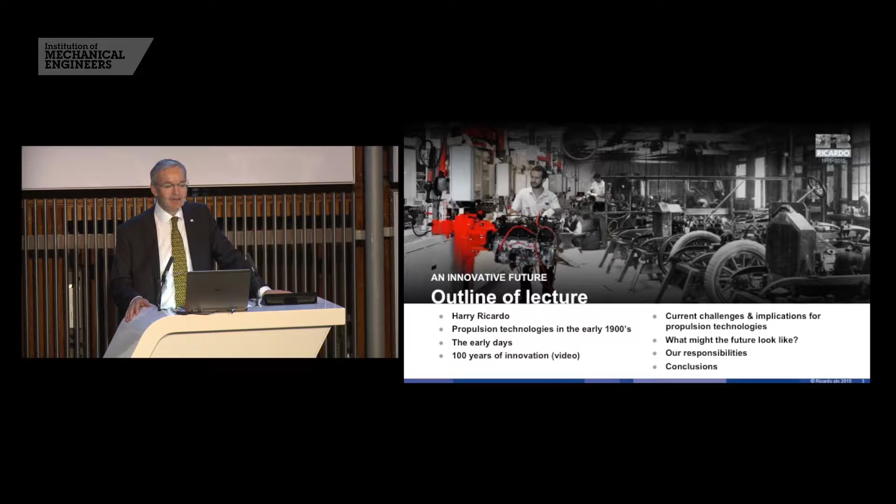depending on the topic. And I'm going to spend some time talking about our responsibilities as engineers. What do we need to do? How can we prepare for the future? How can we set ourselves up to respond the best way? And I'll finish up with conclusions. This lecture takes anything between 45 minutes and an hour, depending on how carried away I get on some topics, but I'll do my best to keep it reasonably concise.

So, to start, Harry Ricardo, born in January 1885. He was one of the foremost engine designers and researchers of the internal combustion engine. But he didn't start off that way. His family business was actually in architecture, and he was training to be a civil engineer at Cambridge University when he got very interested in mechanical things and efficiency.

And he actually entered a prize competition at Cambridge University to try and get the highest efficiency from a motorcycle. He won the competition despite having the largest engine, achieving 40 miles on a quart of fuel. Everybody remembers what a quart is, I hope. The equivalent of around 160 miles per gallon. And in his biography, he explains that that was one of the foremost things that happened to him in his career that really shaped what he would do in the future.

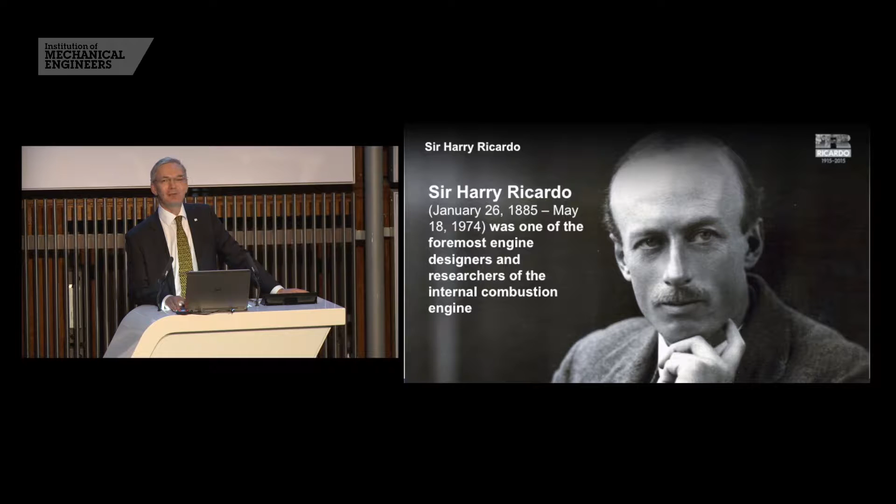To try and put this lecture in some context, I'm just going to start with what propulsion choices were available at the time that Harry Ricardo was at university. So these were generally the choices. You had steam, you had electric, and the early internal combustion engine.

And just to quote something from Harry, which he wrote in 1902: there are 4 different types of engines for automobiles in general use: steam engines, electric motors, naphtha and other vapor motors, which are similar to steam engines in some ways, and hydrocarbon or internal combustion engines. Of these, steam is the most reliable because it is the best understood. So there we are, back in 1902. Steam is actually where the combustion engine is today. And we know what happened after that.

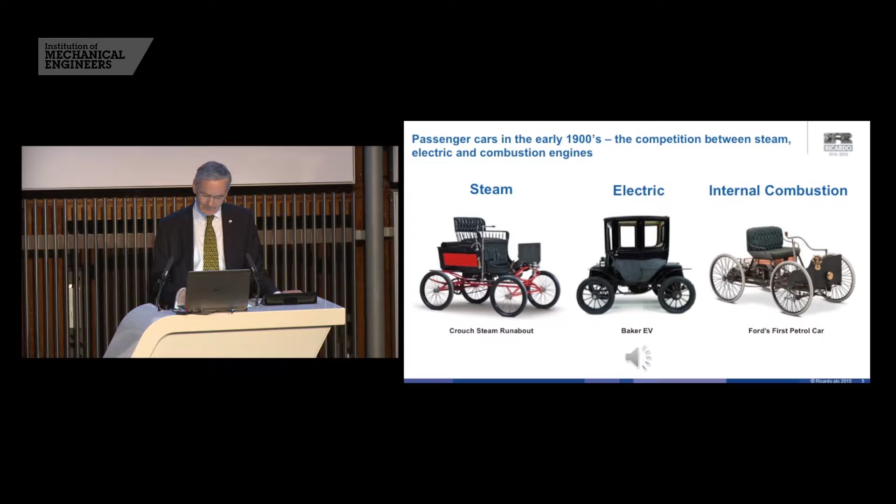If we were to compare those different propulsion systems, the electric vehicles were actually more popular. They were outselling gasoline counterparts by roughly 10 to 1 and accounted for approximately 1/3 of all vehicles on US roads at that time. They were clean, relatively easy to start. However, they were quite expensive. They had a limited range. There were limits on performance, and there were always issues with trying to recharge them. You could argue, well, what's happened so far? How much have we improved?

The charging network in those days was relatively limited, and you had to live pretty near to a power station for it to be viable to charge an electric vehicle in those days. Steam-powered vehicles were reliable, as we described, relatively mature technology, but quite inconvenient. It took a little while to get your steam up. They were relatively dirty and not so good performance.

The internal combustion engine, the primary benefit was its pretty good performance, very good range for a given amount of fuel, and refuelling was quite flexible. In the early days, you went and bought your fuel in a gallon can from a hardware store, but really development of the refuelling network was a key part of how the internal combustion engine won the race in the end.

One of the big changes and the tipping point was probably the launch of the Ford Model T in 1908, and we've got a picture here. Some people have asked me about this picture. What is that young man at the front doing? Is he getting intimate with a Model T? In those days, you had to hand crank the engine to get it started, and of course quite inconvenient for many operators. There were lots of issues with early reliability.

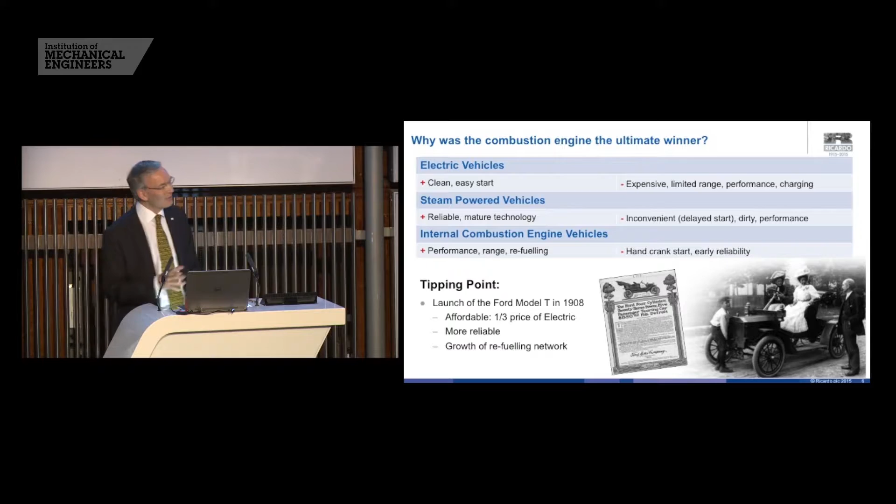So this is the kind of context where Harry Ricardo was when he first started looking into the combustion engine. So a lot of promise from the combustion engine, but many challenges. So his main focus and his main hobby was researching the physics of internal combustion and the design of combustion chambers. And much of this led to some very significant developments, such as the use of octane ratings, the use of stratified charge. In fact, he applied a stratified charge system to an engine he designed and built in 1904, and learning about intake swirl, which we commonly use today. So these are very important things for him.

He built a unique variable compression test engine called the E35 to develop this whole concept of what a fuel would do and when it would start to knock. And the work that he did to develop higher octane fuels directly led to Alcock and Brown flying the Atlantic in the Vickers Vimy bombers. Not many people know that, but that was a key link into this new octane. He explored stratified charge, as I described earlier, and also things like negative valve overlap. I mean, it was back in the early 1900s, very advanced for his time, and something that we regularly look at today.

What I want to do now is show you some very early combustion photography that was done. It has some combustion in and shows how things have developed over time. The first frames show early attempts to characterize in-cylinder flow, and the unique way of looking at this was to put little wool tufts on the top of the piston and film it as the engine was turning over to see what was happening with the air motion.

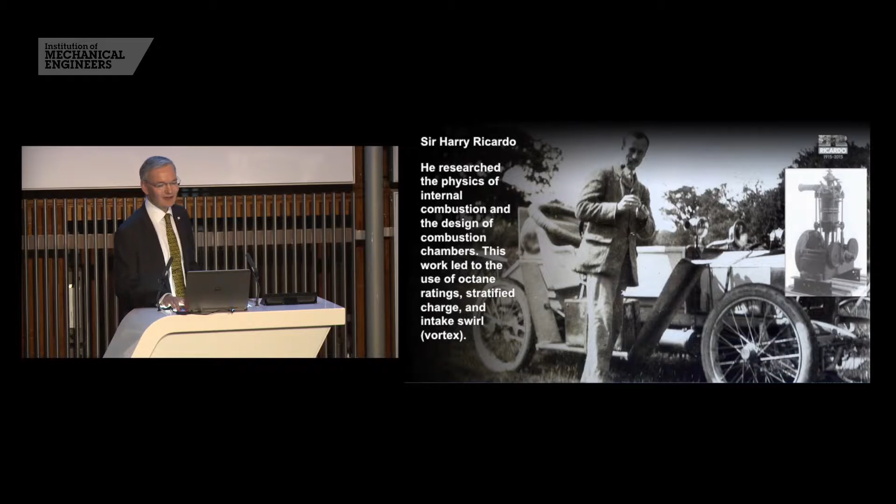And it's actually narrated by one of our past employees, Murray Scott. Murray Scott was one of our most renowned diesel engineers who joined us in the 60s, and perhaps one of his claims to fame was he probably produced the very first diesel Jaguar. He was a very keen diesel engineer. He had a Jaguar, thought, why don't we put a diesel in a Jaguar, and did that all himself as his private motor car. That's how enthusiastic he was. So I'll just play this just to give you some idea of some of the early work.

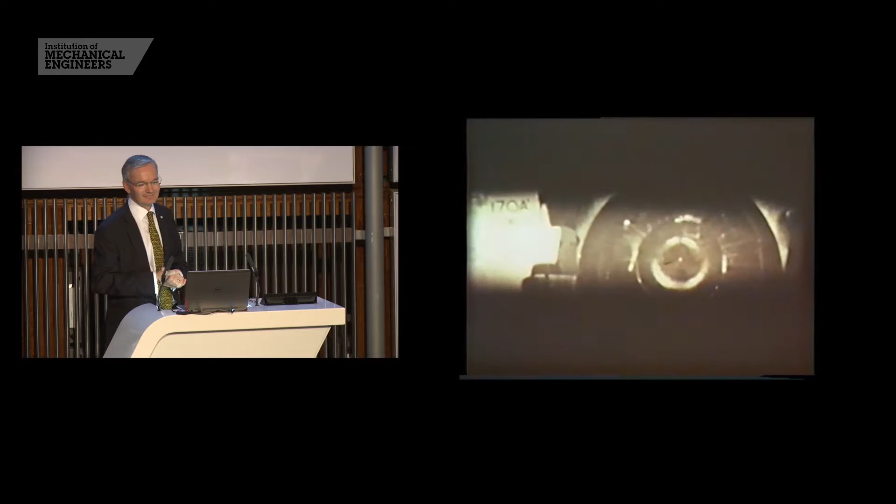This film of cotton streamers attached to the piston and head of a motored direct injection engine indicates slight inward motion before top-dead center and a reverse squish of much greater magnitude after TDC. It is interesting to note that the air velocities during the scavenge period have much greater influence on the cottons than does the squish.

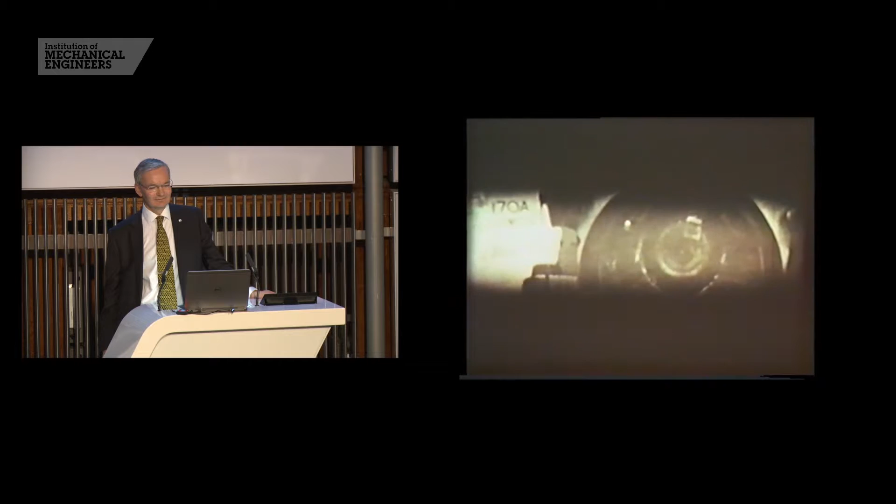So these are some later combustion results, very early combustion results with very high-speed photography. We dug out of the archives showing a direct injection system. Then we're going to show a more modern system, and then what we've been doing lately to actually model that and predict exactly what's going to happen. And we're comparing the two together here to give you some understanding of the correlation and what can be done. So the idea behind these videos is to show you how important that early work is and what was discovered during that time.

Perhaps the best way to describe the origins of the Ricardo company is to look at this very first project that Harry Ricardo was involved in. We'll show a little bit more about this in the video, but the early tank engines in World War I had a lot of issues, very unreliable, and Harry was commissioned, because of his knowledge of early internal combustion engines, to completely redesign a new engine.

It's a relatively large engine, a 6-inch bore engine with crosshead pistons. I'm sure those of you who know engines know what the crosshead piston is. You have an extra link between the crank and the piston, so the connecting rod goes up and down vertically, and you can separate the lubrication from the piston from the lubrication to the crank system. And that proved to be a great success. That technique's still used in very large engines today.

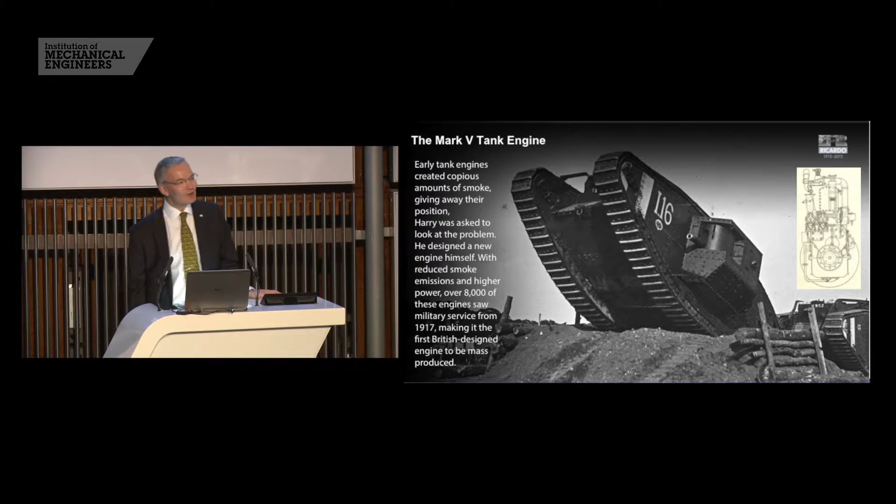The ratings for the engine, anything from 150 to 260 horsepower, was by far the most powerful petrol engine available outside of aviation. Many hundreds were built, and we'll show a little bit more about that in the video. What was interesting was that the Mark V tank engine royalties enabled him to purchase some land to build our original Shoreham Technical Centre. This is a picture of the centre right in its very early formation stages.

There's pretty much, I think, only one building still standing today, which is this one here. You might also be interested to know that this road along here was the main South Coast road at that time, with special passing places on the bridge, because it was single file. And that bridge is still there today, but no traffic goes over it, fortunately.

So we can trace the beginning of the company back to a company that was formed called Engine Patents Limited on 10th of August 1915. This was around designing a new two-stroke engine, and with it the filing of Harry's first patents. It was a commercial approach he used throughout the business career with Ricardo and helped to fund his passion for developing new technology.

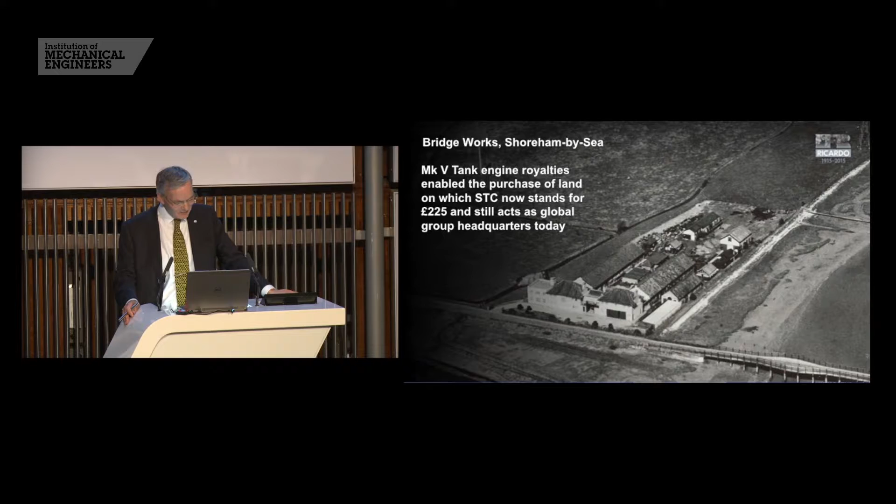As a result of all this work he did on the Mark V tank engine, the Defence Ministry paid Harry £30,000. Now, £30,000 in that date was worth about £1 million today in royalties. And that enabled him to purchase the land that now houses our Shoreham Technical Centre. He bought that for £225, about £10,000 today, and he spent a further £15,000, about £500,000, building and fitting out his new research laboratory. So that gives you some kind of idea of the early stages of the company.

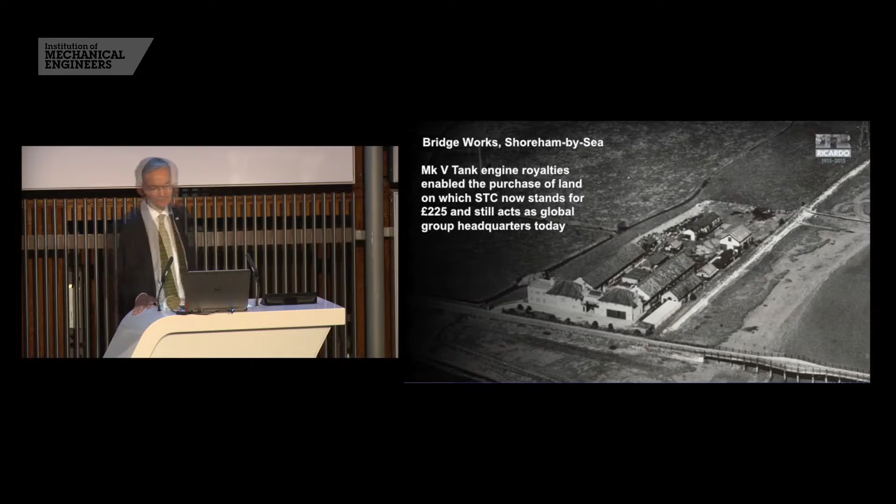To set up our video, which I'll show now, which describes how the company developed since its early beginnings and some of the innovations that were generated. Ricardo, 100 years of innovation and technology. In 1915, the gentleman engineer Harry Ricardo founded the business which is today known around the world as Ricardo plc.

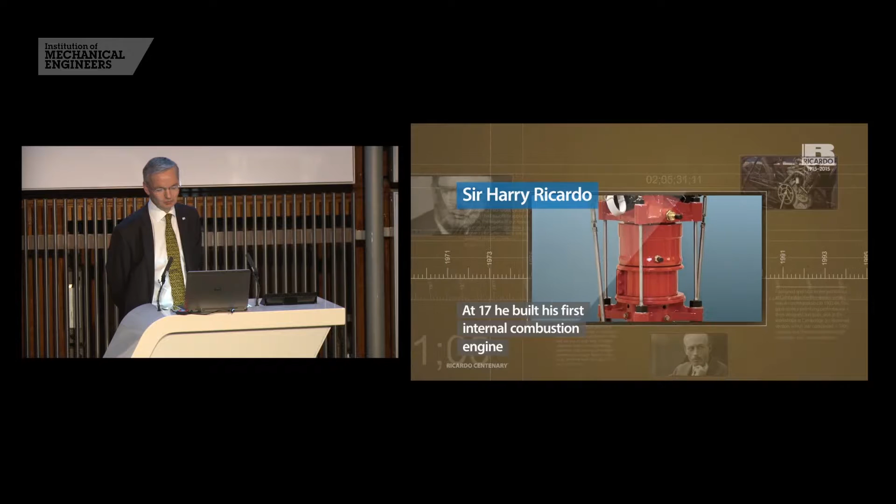From a very early age, Harry was interested in all things propulsion. He built steam engines as a child, and during his time at Rugby School, his schoolmasters didn't know whether to commend or reprimand him when he fitted a steam engine to power his bicycle. By the age of 17, he had designed and built his first internal combustion engine to pump water from the well at the family home. He went on to study at Cambridge University, where he built his own motorcycle, joined the University Motor Club, and won their inaugural fuel efficiency trial in 1904, despite his motorcycle sporting the largest engine in the contest.

Harry became one of the foremost engine experts of his generation and received a knighthood in 1948 for his work in the field of internal combustion engineering. He retired in 1964, but the company he founded continues his relentless drive for innovation and technology to this day.

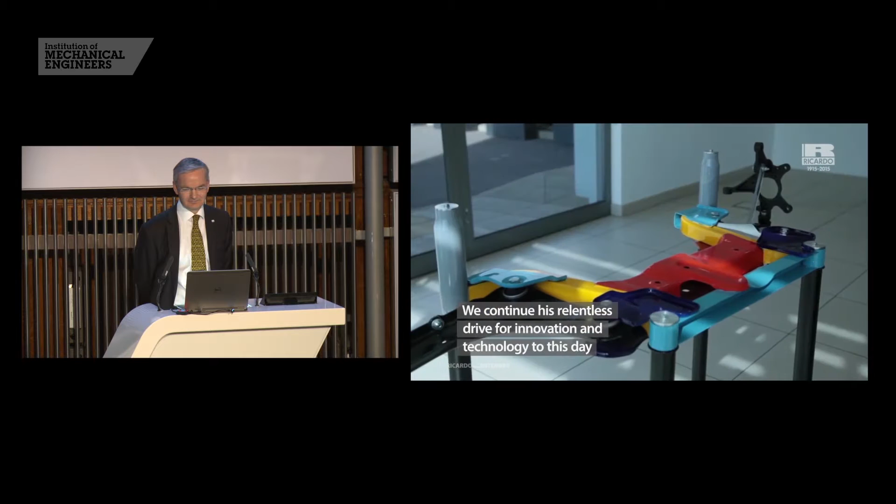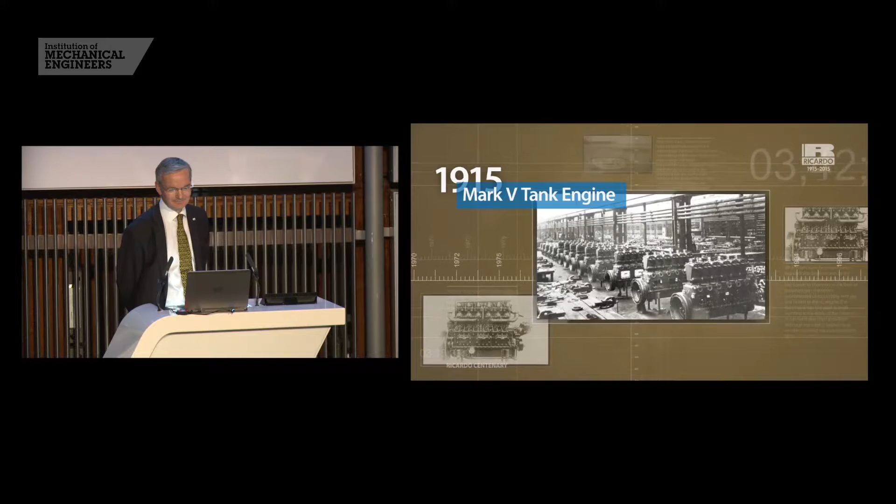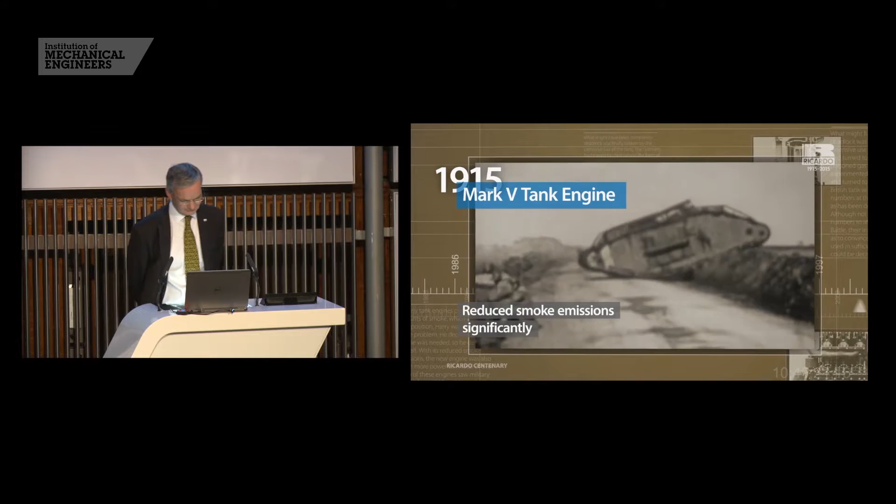Our first major project was in 1915, when Harry was commissioned to apply his advanced combustion knowledge to the Mark V tank engine. Early tank engines created copious amounts of smoke, which gave away their position. Harry was asked to look at the problem. He decided that a new engine was needed, so he designed it himself. The new engine reduced smoke emissions significantly and was also much more powerful. In total, over 8,000 of these engines saw military service from 1917, making it the first British-designed engine to be mass-produced.

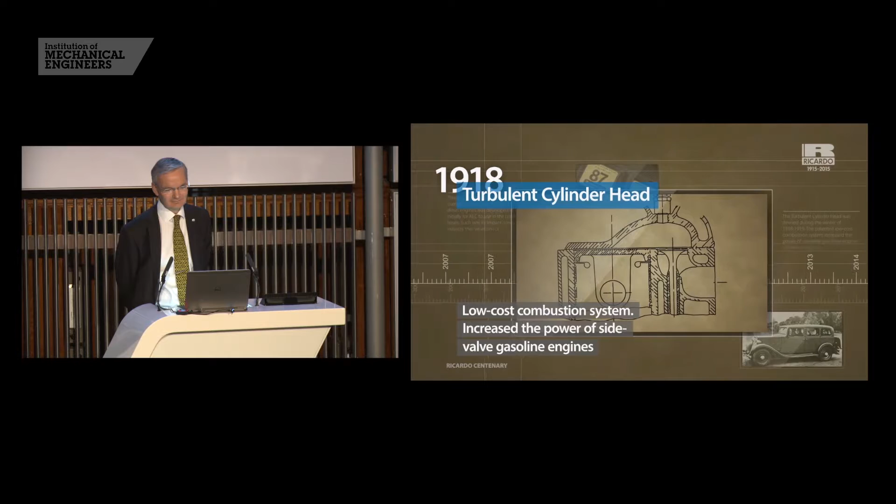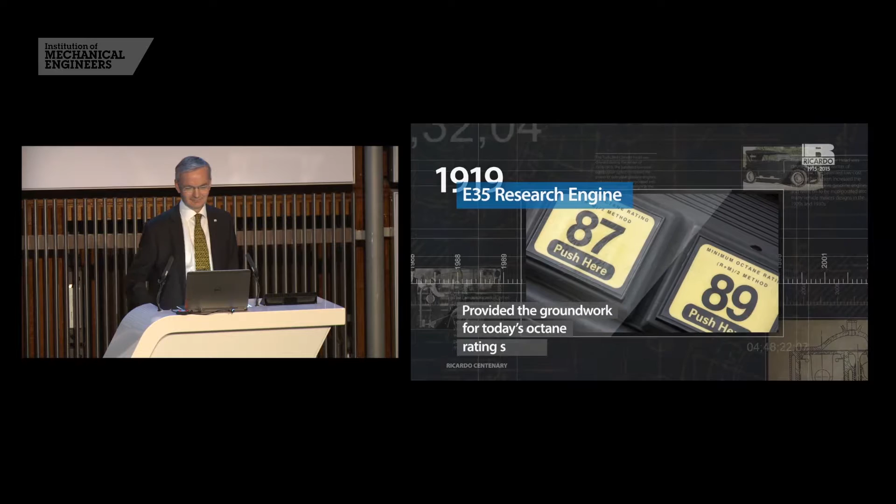Many combustion innovations followed. The turbulent cylinder head, devised during the winter of 1918 to 1919, was a low-cost combustion system that increased the power of side-valve gasoline engines. The variable compression ratio E35 research engine, developed in 1919, enabled the combustion properties of fuels to be accurately analysed and provided the groundwork for today's octane rating system.

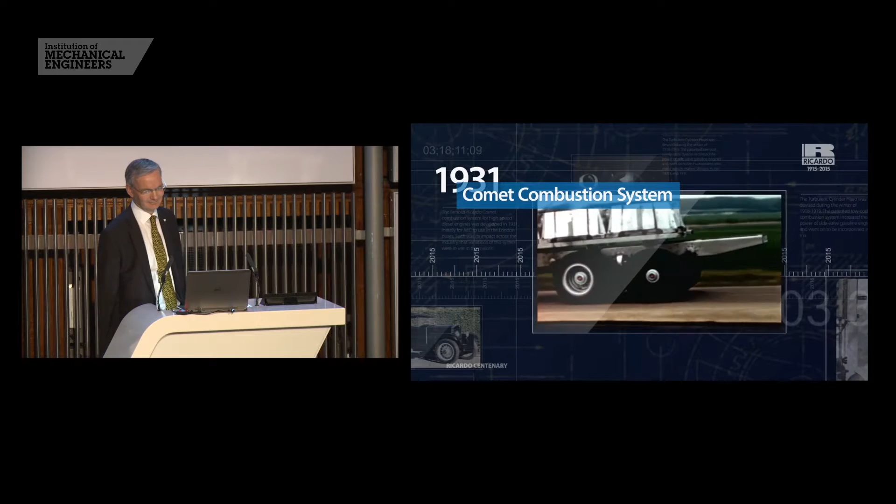In 1931, the Ricardo Comet combustion system for high-speed diesel engines was developed, initially for AEC to use in London buses. However, such was its impact in reducing smoke emissions and improving fuel economy that variations of this system were still in use in the majority of diesel passenger car engines until the mid-1980s.

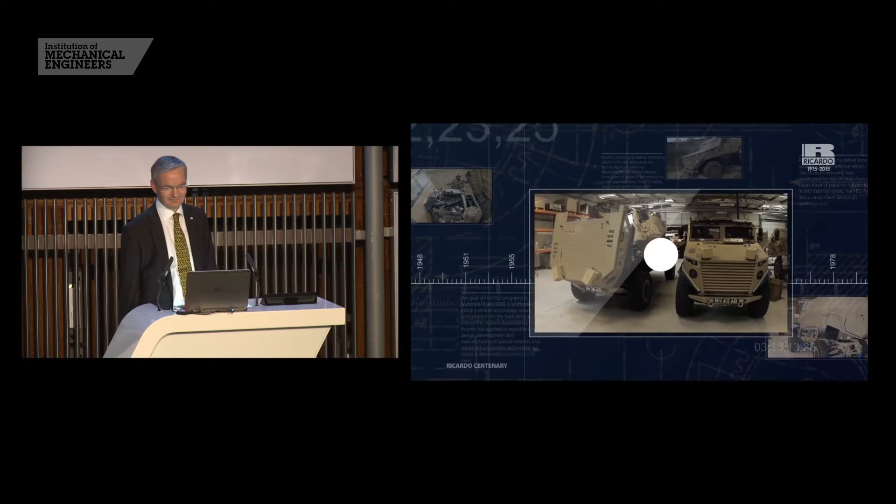The breadth of our expertise has grown and now covers all major vehicle systems, from engines, transmissions and hybrid and electric systems right through to complete vehicle design and production, such as the Ocelot Foxhound for the UK Ministry of Defence and the FED Alpha for the US Army.

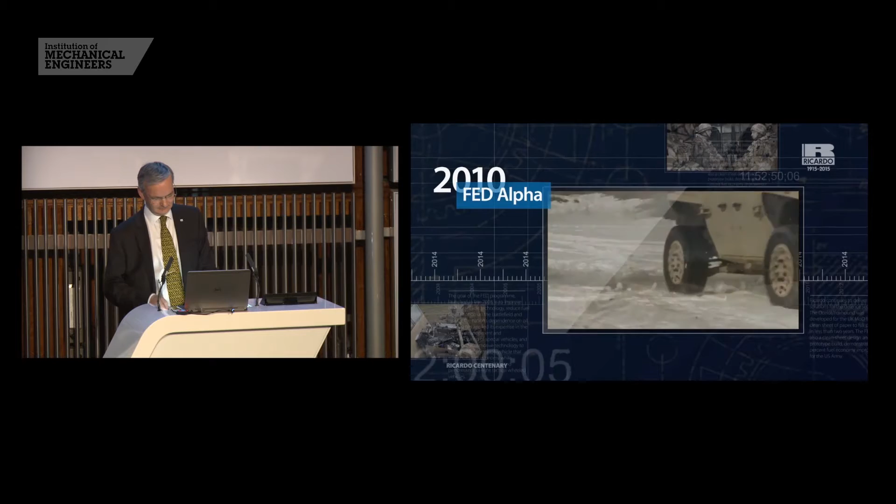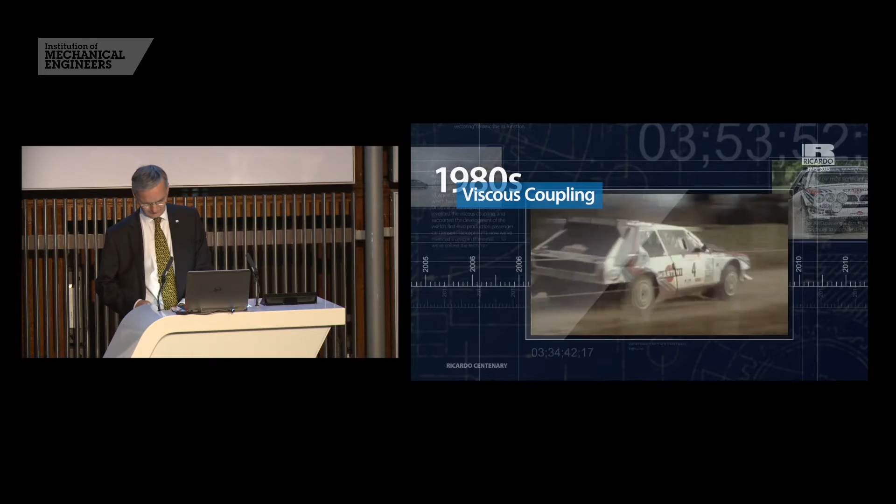One of our most significant transmission innovations was the Viscous Coupling, which turned world rallying on its head in the 1980s in the pioneering Group B rally cars. The runaway success of these four-wheel drive cars established a whole new market sector for all-wheel drive passenger cars. We continue to supply engines and transmissions for many motorsport formulae today.

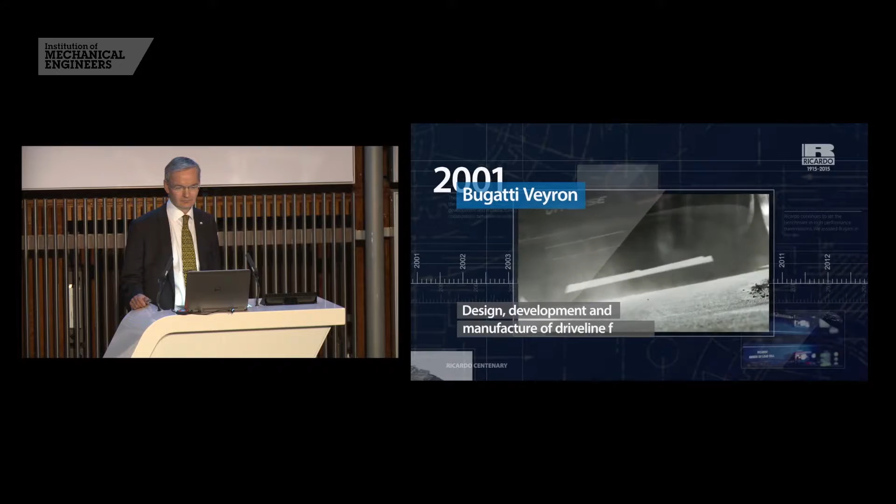We continue to deliver world firsts in four-wheel drive systems, and since 2001 we've assisted Bugatti with the design, development and manufacture of the highly advanced four-wheel drive dual-clutch driveline system for the Bugatti Veyron, the world's most powerful road car. Another world first was the record-breaking JCB Diesel Max.

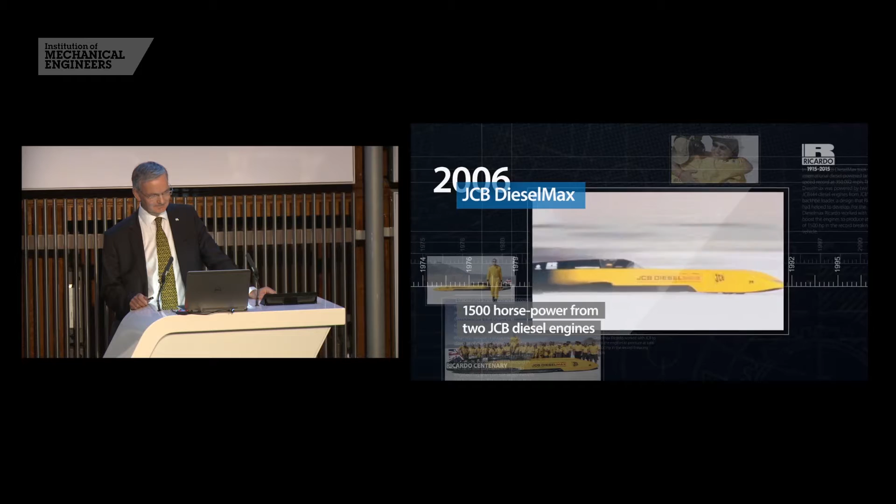Powered by two JCB 444 backhoe-loader diesel engines, we worked with JCB to boost the engines to produce a total of 1,500 horsepower in the JCB Diesel Max, which in 2006 took the FIA International diesel-powered land speed record at 350.092 miles per hour.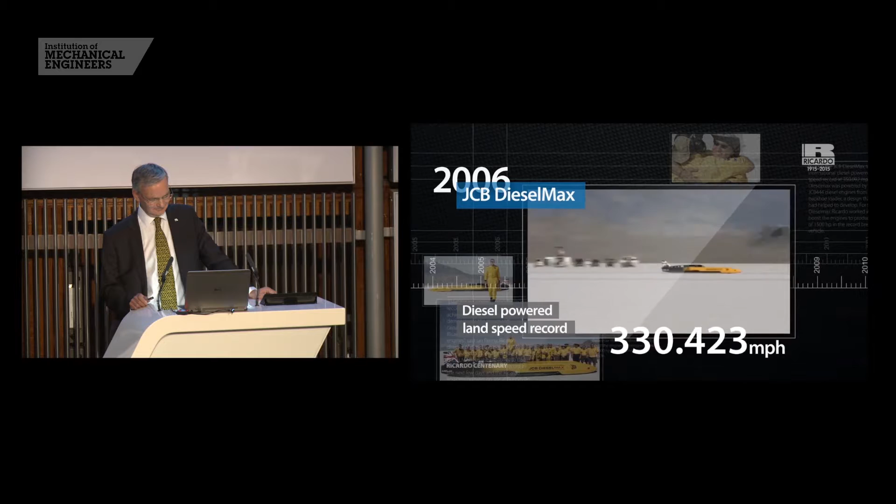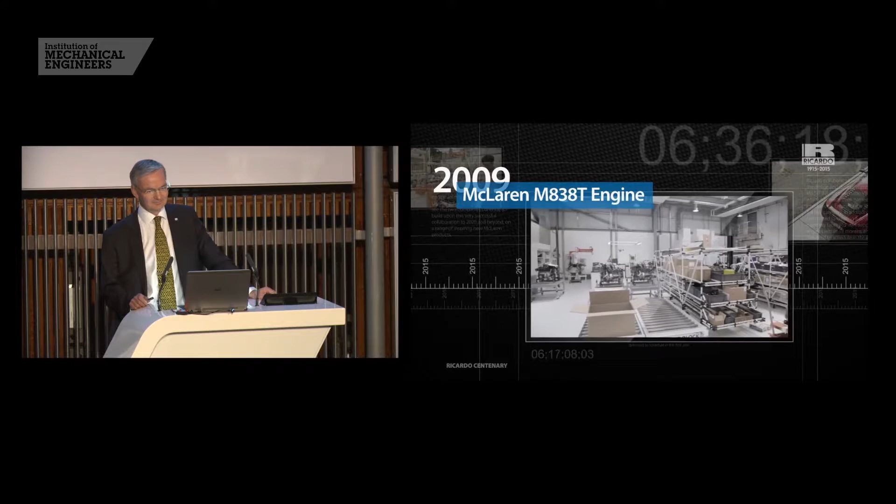In 2009, we collaborated with McLaren on the design and development of their 3.8-litre twin-turbo V8 engine. As part of the project, we also committed to creating a dedicated assembly facility to supply the engines within 18 months. The engine has twice been named International Engine of the Year in the 3 to 4 litre category.

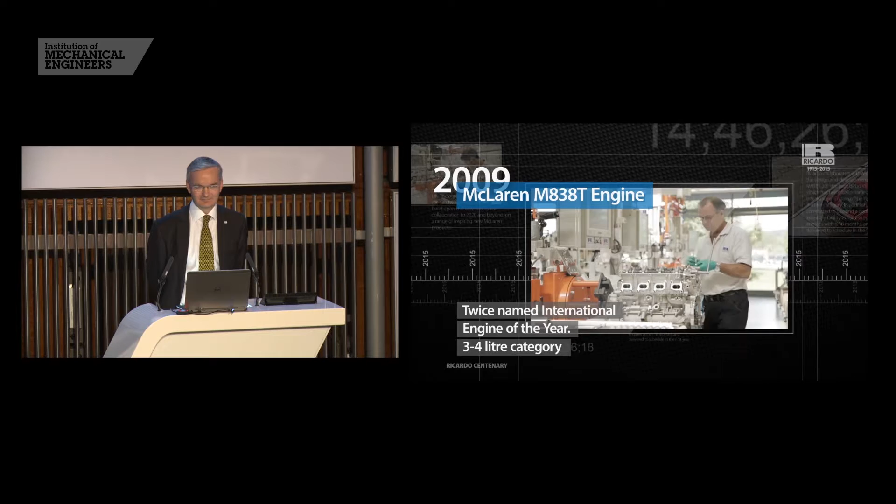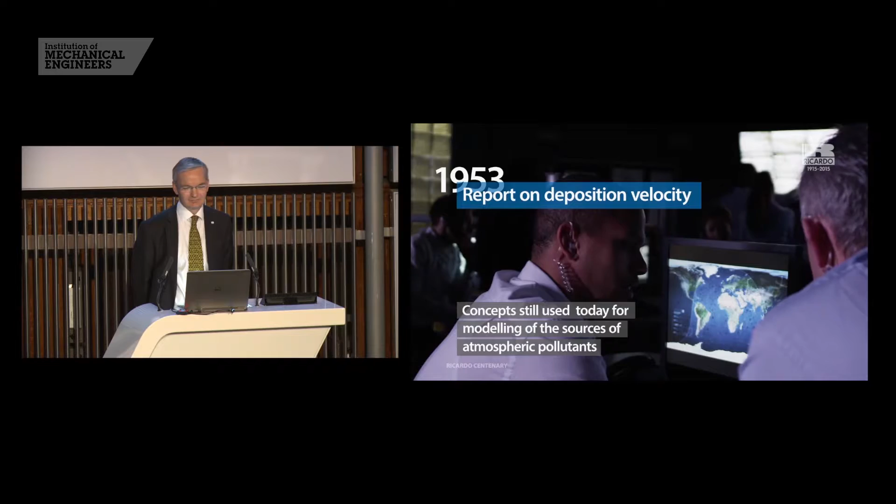As well as engineering a wide range of transportation solutions, our business also boasts a rich history in delivering strategic, energy and environmental consulting services. For example, concepts from a 1953 report on deposition velocity are still used today as the basis of sophisticated computer modelling of the sources of atmospheric pollutants, their concentrations in the air and the exposure of populations and ecosystems to them.

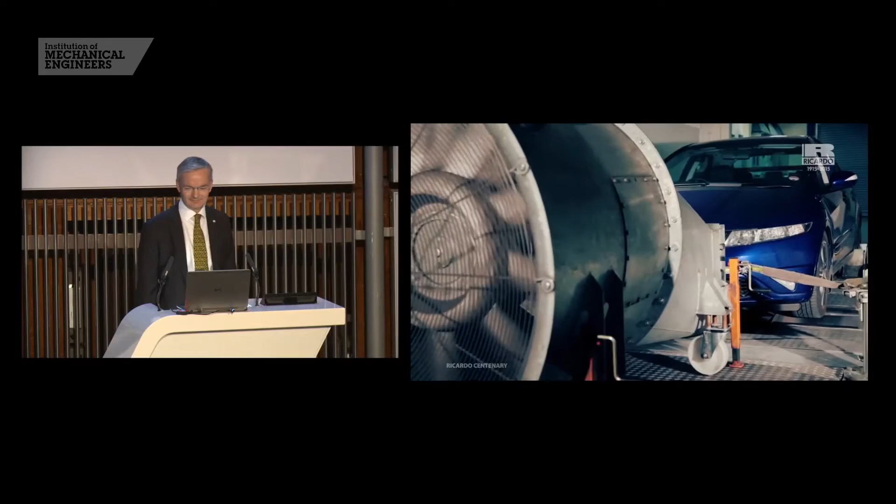Our vision for the next 100 years is to deliver a sustainable future through our work in transport and security, energy and scarce resources and waste. We believe the world needs companies like ours, underpinned by a culture of innovation and a complete team of great scientists and engineers committed to making a real difference. Delivering excellence through innovation and technology. It's what we've been doing for 100 years.

Okay, works second time, which is good.

So just as a summary, these are the innovations which were developed by decade, some of the key things that we went through. As you'll notice, in 2006 we got the diesel land speed record for 330 miles an hour, but it wasn't the first land speed record. We also got a diesel land speed record back in 1936 with the Flying Spray. That achieved 159 miles an hour, so it was good to get it back again after a while.

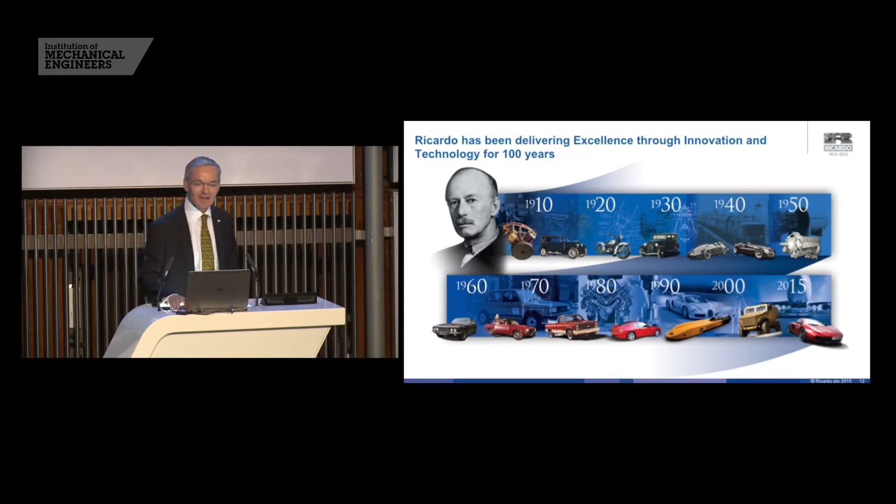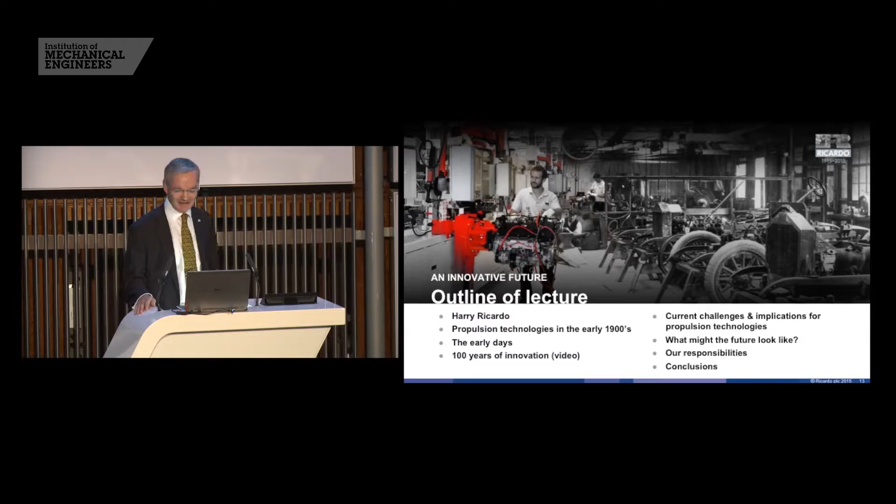What I'm going to do now is move on to the second part of the lecture, which is all about the future. I'll start with the current challenges and implications for propulsion technologies and then look a bit further ahead. So to start with, what are the key challenges that we see going forward for our business? First one here is low carbon, affordable energy. Future energy is a major challenge globally, given the investment required to decarbonise the supply and make it affordable to the consumer at the same time. It's going to take vast investment to make that work, much more investment than we see required to decarbonise transport.

Future mobility is also a very big core challenge when we must also decarbonise transport whilst improving safety and security. When we talk about safe and secure, we have to recognise that around 1.3 million people are still killed on the road every year, and 7 million are seriously injured. It's really something that we must do something about. In addition, we lose about 90 billion hours per year for drivers stuck in congestion and traffic. What a waste of time that is. How do we address that challenge?

Increasing demand for consumer products also leads us to pressure on supply of scarce resources. We'll need to make much more efficient use of these resources using recycling and remanufacturing as a major strategy. And I'm going to go through these issues in turn.

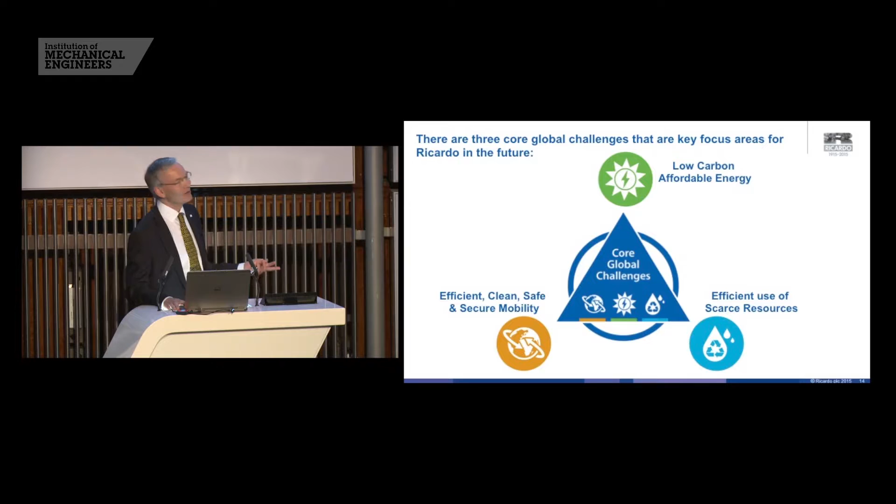But I want to start really with mobility and the revolution that we're likely to see in connected mobility as well. So to start with, increasing requirements for developing these safe and secure vehicles will lead to a very rapid expansion in how we use intelligence and connected systems.

Just goes to show that us as individual humans really need a bit of help to organise ourselves to make the best use of our road infrastructure. And that's what we're looking to do with the connected mobility systems. And I'm sure it's achievable.

We also need to look at how we connect different forms of transport together. So whether we're running trains, rapid transit systems, vehicles, pedestrians, other forms of transit, making them seamless and connect together as well as possible is entirely within our capabilities in intelligent transport systems.

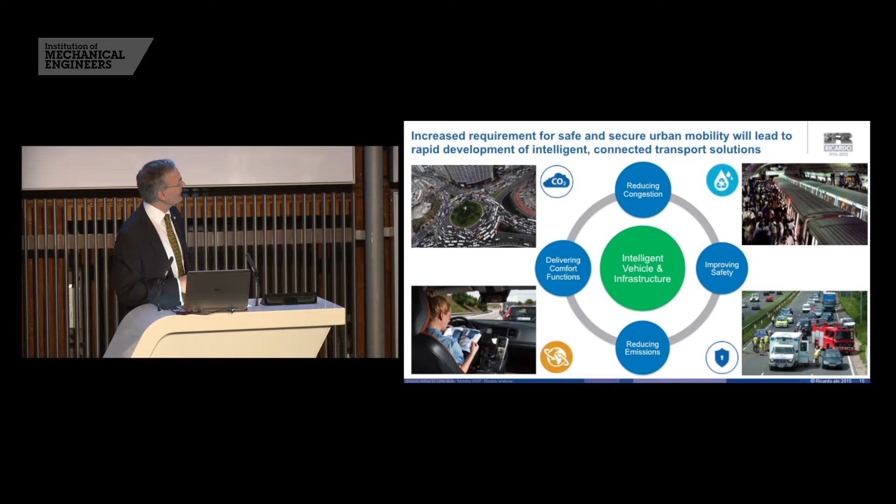We also, as I've described, need to massively reduce the number of accidents that occur. And to do that, we need to take away some of the human driver errors that we have, which are by far the largest cause of accidents. And that again will come down to how we use these intelligent systems, maybe to the point where the driver is not necessarily driving the car anymore. I'll say more about that later.

Another big issue that we have is our resources and how efficiently we use our resources. Just as an example, I was over in the US last week, and the US model, don't want to be too critical of our US colleagues, we have many customers there, is a very linear model. You dig something out of the ground, you turn it into something useful, and then you throw it away. It's not really a very efficient use of resources.

What we need to move towards is the circular model, the circular economy. So how do we recycle things? Using more of a biomimetic approach, how nature uses things. Having said that, we've made great progress in automotive. So automotive recycling is really a world leader.

The 2015 End-of-Life Vehicle Directive sees material reuse at something like 85% just as recycled materials, and including the amount of material that is used again or recovered, including incineration, is around 95%. But the vehicle manufacturers are now responsible for disposal and reuse of the vehicle at the end of its life. And our view is that will extend to pretty much all products within a limited time. But it's a very important thing to grasp.

We must also, when we're looking at future products, look at the whole product life cycle when we're assessing its impact on the environment. Just looking at its in-use emissions is too limited. We need to look at how much is involved in digging material out of the ground and processing it, how much in the manufacturing, how much in use, and how much in disposal.

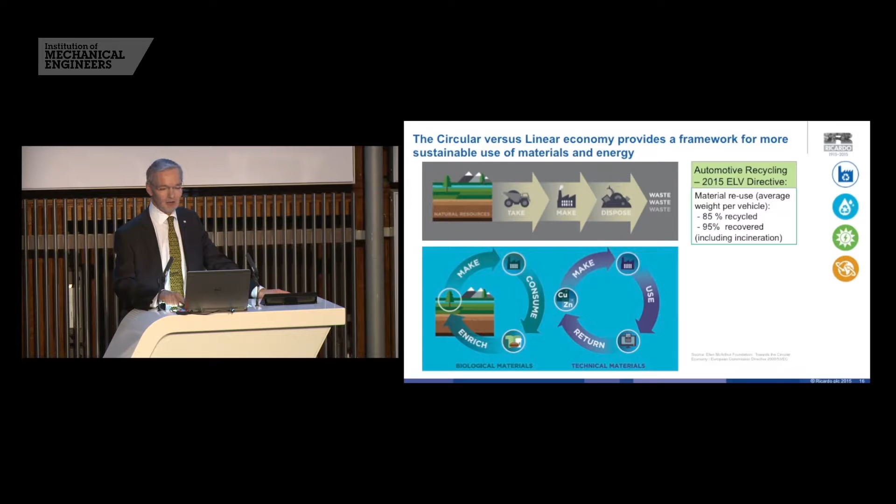It shows many, many countries and their different regulations, but they're all headed towards a very similar position in terms of CO2 emissions. What you'll also notice is it's not the end of the regulation when we get to 2020 or 2025. Those regulations will continue to be more aggressive and drive even further improvements. And it's perhaps the rate of reduction that is the real challenge.

In Europe, we have to achieve something like 3.9% per year improvement in CO2 to get us to the 2020 targets. In the US, it's 4.7%. And that is a real challenge, given their history of doing very little with CO2 emissions over the last 10 to 20 years. It's perhaps the biggest challenge.

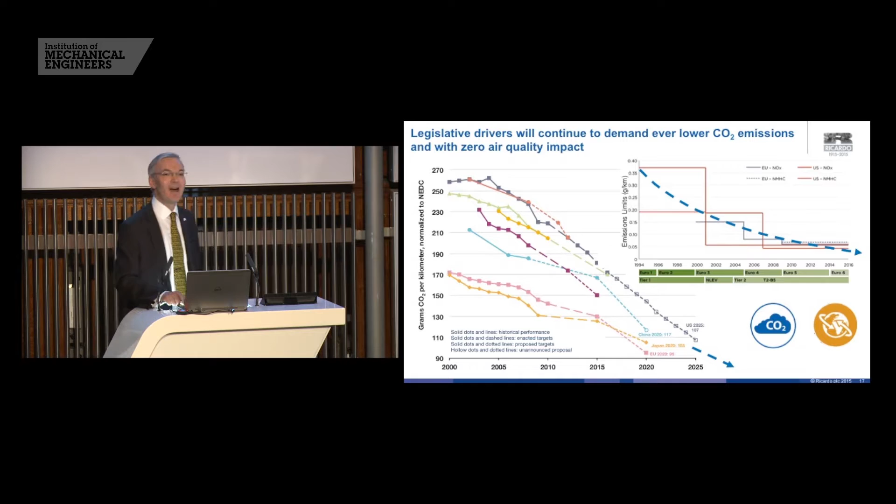But we're still missing the air quality targets for NO2 in London. There's still a lot of work that has to be done. And as you might guess, we need to get these pretty much to virtual zero, to get to zero impact on the environment, which is the overall target. How long it will take us to get there, I'm not sure, but I suspect by the mid-20s we can say that modern vehicles have effectively zero impact on the environment from their combustion engines. And there'll be other things that we're probably more worried about, such as tyres and brakes.

The advanced internal combustion engine, probably connected in some way to electrification, will be the mainstay of our future power plants. All of the predictions I see show that by 2035 to 2040, something like 75 to 90% of vehicles will still employ some form of internal combustion engine. However, we do need to find a way to recover energy as we slow the vehicle down, rather than just turning it into heat as we do with brakes at the moment.

And we also need to find ways to use some of the wasted heat energy that we provide from the fuel. At best, the modern combustion engine only uses about 30 to 40% of the energy in the fuel. The rest is just thrown away, and we need to find ways of turning that heat into useful energy. There are alternatives to using conventional fossil fuels as well. We can run with electric vehicles, but we need to reduce the carbon intensity of the grid if we're going to make that effective. So we need to have low CO2 electricity.

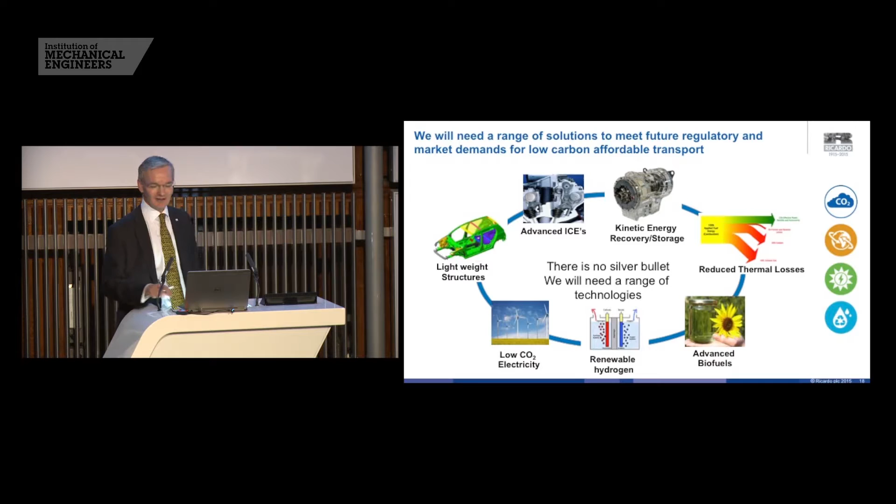There are lots of challenges associated with electric vehicles, but for many applications they could be the solution, particularly in cities. A number of large automotive companies have decided perhaps the electric vehicle isn't going to make it. The challenges with batteries and energy storage are too great, and actually the best bet will be the fuel cell vehicle. And there are some significant trials underway in Europe and in the US to actually put some of those vehicles on the road in larger quantities to see how they work and how they interact.

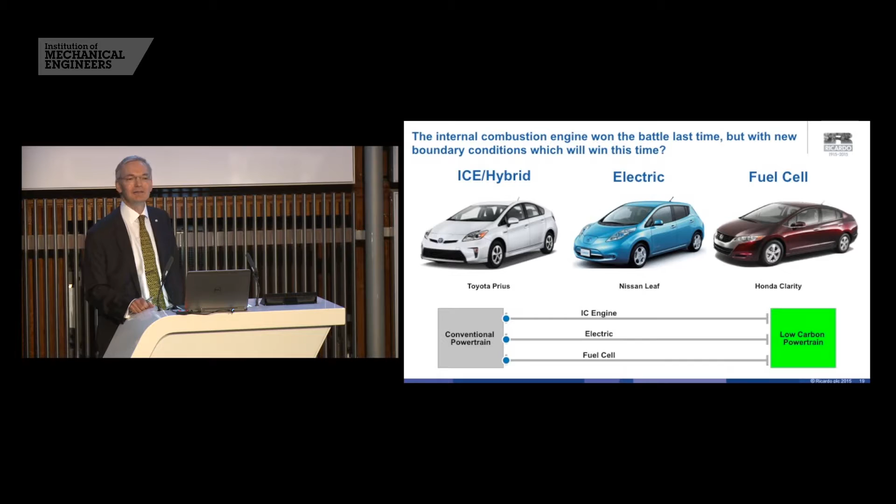However, there's always the challenge that hydrogen fuel cell vehicles are always seen as the vehicle of the future, all the time. Every time it's the future rather than the present. So it'll be interesting to see how those might develop. And of course there's the internal combustion engine hybrid or plug-in hybrid. In some ways that's probably the best bet for the short to medium term. But we must remember that we've been working on the internal combustion engine for many, many years. Electric vehicles intensively only probably for the last 10 or 20, and the fuel cell's really been at quite a low level. And there's a lot more work to be done to turn this into a commercially viable product.

In order to talk a little bit more about the future and where this all might be heading, we've tried to look at megatrends, looking at socio-economic and other megatrends and geopolitical trends to try and work out what the world will be like in the future. Ricardo is traditionally an engineering company, but since we bought an environmental consultancy, we now have a number of social scientists in our group who've really helped us with this. As you know, social scientists and engineers do struggle a little bit sometimes with communication, but we've done our best to try and get these into a concise and engineering-wise table.

So the first one here is population growth, 7 billion to 9 billion by 2050, and something like 60% of those will be Africa and Asia. That will have an impact, and the implication: even more demand for scarce resources, more demand for mobility and energy, and perhaps a change in geo-economic power. There's urbanisation. 2/3 of the world's population is predicted to reside in cities by 2030. And even more megacities. Even bigger challenge for urban people and goods mobility and what comes with that, which is overcrowding and congestion. So even more challenges.

We're going to get increasing incomes and wealth. The prediction is that 60% of the world's population will be middle class by 2030 from about 27% today. What does that mean? A much improved access to education, better healthcare, and an increasing ageing population. It does also suggest more individual choice and freedoms and the rise of the individual. The big one perhaps though is connectivity, the exponential growth in volume and access to information, leading to all sorts of expected trends such as the interconnected global economy, growth of intelligent services and artificial intelligence.

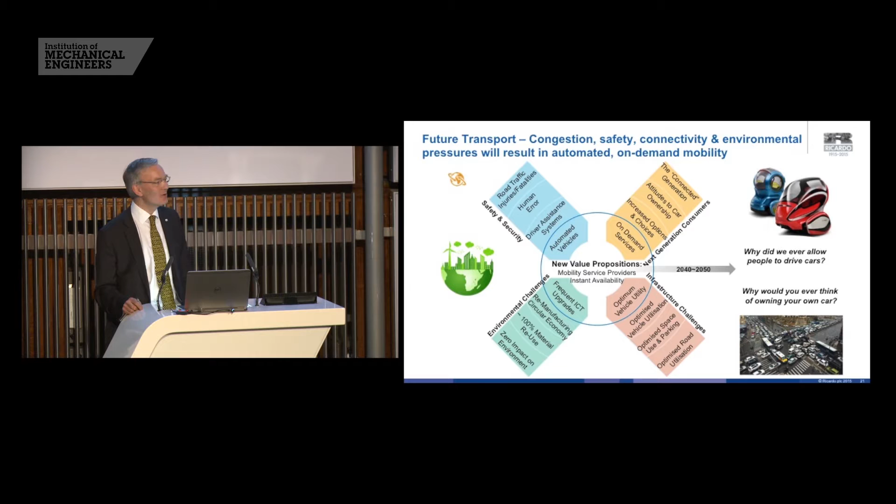But we could easily end up by 2040 to 2050 with some key questions here. Why did we ever allow people to drive their own cars? How dangerous was that? Why did we let them do it? Of course, absolute mayhem. And then why would you ever think of owning your own car? What a limited prospect that would be. I think these are really 2 key points that we need to bear in mind for the future.

Utility on demand. You get any vehicle you want when you need it. Fully autonomous. You can do whatever you want in your leisure while you work. Platooning, pretty much a substitute for public transport. All the systems connect together. We don't need traffic lights anymore. Everything will avoid crashing into each other.

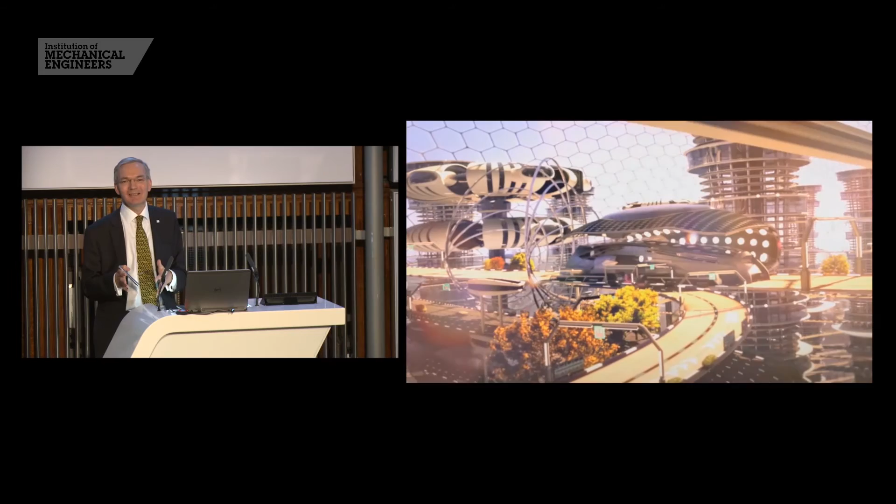Auto-charging, inductive, when vehicles need charging, they'll find a way of doing it. And then when you finish with the vehicle, it'll either move on to go and pick somebody else up or go and park somewhere out of the way till it's next needed. So this is an overall vision of the future. 2030 might be a bit early. It's probably 2050, 2060, particularly with some of the infrastructure changes here, but I think it illustrates the point. But all of this has to be powered by some form of energy.

What we've done here is put together a very simple cartoon of how the future mobility system might work. We're looking at three environments: the urban, inner city, and business districts, and how these are serviced by various transport means. We have our personal transport system in the urban area, which can communicate and drive into the city, or in the business districts as a platooning system. We'll have automatic parking and charging.

We also have access at various points to commuter rapid transit systems, and where necessary, high-speed intercity transit as well. On top of this, we need goods mobility, and we see a separation between long-distance transport via urban hubs and inner-city deliveries and urban deliveries using different types of vehicles. But of course, we'll need different forms of energy to do these different forms of mobility. Increasingly, all of these systems will be massively connected via all sorts of communication systems and positioning systems with various forms of cloud processing to ensure we're using the infrastructure and the vehicles as efficiently as possible.

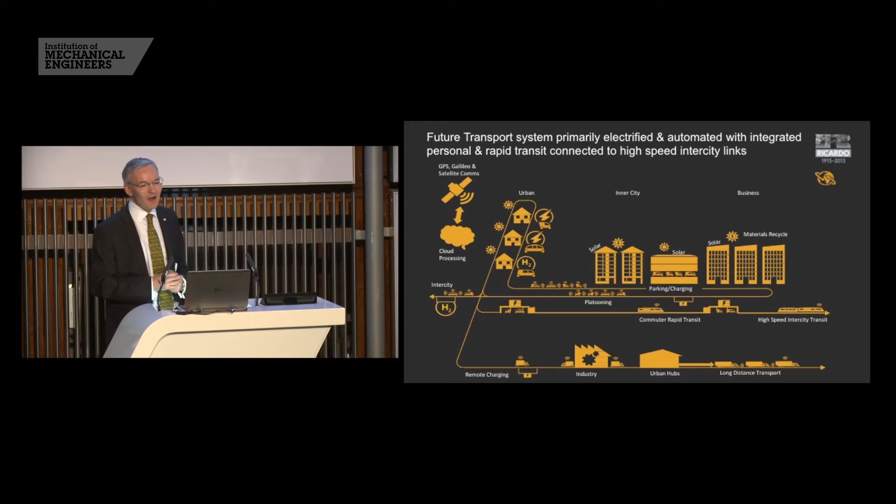So moving on to the energy, affordable low-carbon energy supply will require this long-term investment and various other drivers. So I have four key areas here. First one, availability. Really key thing for us is demand reduction and efficiency. We have a certain amount of that at the moment, but making buildings almost energy independent has got to be a major driver for the future. Living with zero waste. So if there is any waste, don't throw it away, use it for something, maybe waste to power, either turning it into liquid fuel or using it directly for heating. We have limited biomass availability, and we'll need to use it in the best place. Maybe that isn't in power generation, it might be in mobility.

We also will have an increasing challenge of security of supply, the geopolitics involved. Many countries will be challenged with that particular issue. We'll have supply issues. Distributed renewables, increasingly important. Increasingly solar. Solar photovoltaics, solar thermal, using wind farms, local wind farms, bigger wind farms, all connected together, all of them controlled by the sun, of course. We'll need distributed and large-scale storage. Much of our renewable energy comes at the wrong time. How do you store that so you can reuse it, but we'll need to store it on a large scale and also on a small scale.

Maybe there are new technologies. It may be within our lifetime that fusion becomes a commercial reality. Not sure that we should bet on that, but there's a lot of work going into that. Maybe there's some new physics that arise out of the latest physics experiments in the LHC. You know, they're the things that we can't predict for the future, but what we do know is by 2050 we need to see an 80% reduction in greenhouse gas emissions. In terms of distribution, the supply network is a very expensive element in the system and something that's very difficult to invest in to see a return.

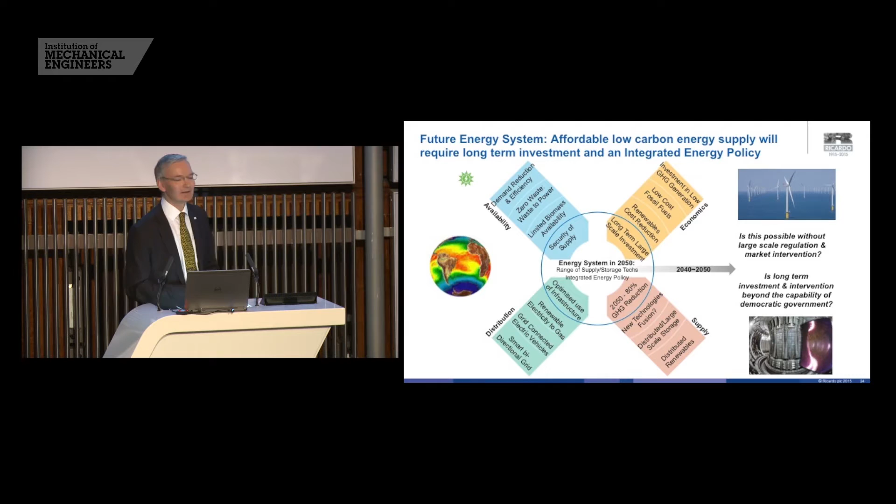Is this all possible without large-scale regulation and market intervention? Probably not, on a much larger scale than we've seen in mobility. But is long-term investment and intervention beyond the capability of democratic government, who can only make short-term decisions? Somehow we need to find a way to follow the lead of the Chinese and have 20-plus year plans, particularly on infrastructure investment. Take it away from the short-term political issues that arise.

Again, we've put together a cartoon of how all this fits together. So you'll see along the top a range of different supply systems, fusion heat and power, increasing wind, solar, wave and hydro storage, connecting that to distributed solar systems on the urban, city and business districts. We'll be incinerating any waste that we can't recycle to give us combined heat and power. Perhaps we'll have power to gas and heat and gas storage, either as methane or as hydrogen, and connecting that into industry and perhaps the urban hubs for transport.

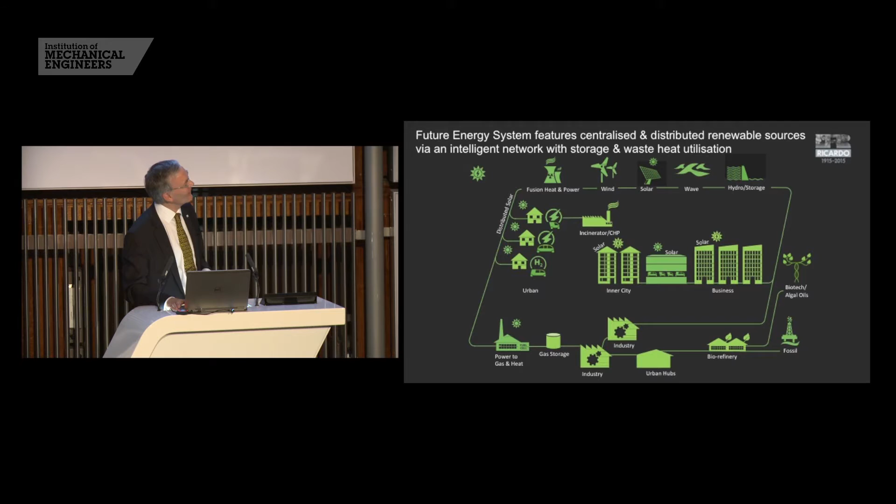We will probably still need an element of fossil fuel, but much lower than we have today, and a very big industry in biotech and algal oils or similar to give us long distance, high energy density fuels for our long distance transport. So all of this fits together into an integrated system, again using artificial intelligence to make all of the systems work as effectively together as possible.

We look now at future resources and where those are going. We've talked about the issue over the linear and the circular economy. If we put a policy regulation, one of the key issues many governments are trying to address is resource security and resource nationalism. Probably many of you are aware that a number of magnetic materials are now restricted from export by China. They see that as a competitive advantage. And increasingly some of these rare materials will be seen as economic weapons. To address that, we need to look very carefully at resources and recycling, maybe some future regulations to drive the right behaviours, and an integrated resource and recycling plan together on a national basis to ensure that those products are used effectively.

We've got business drivers. Every business will need to have a waste reduction strategy. How are you going to use your waste? How do you use it locally? How do you develop a sustainable supply chain with your local businesses? And how do you design right from the beginning for remanufacture, for reuse of your product rather than just scrapping it, splitting it all down and starting again?

There are consumer impacts and drivers. Massive increase in demand for resources, not just material resources, but things like water. Our own prediction is by about 2050, 2060, we'll have passed this whole issue of CO2. We'll say, well, we solved that problem. The next challenge is we just don't have enough water in the right places to grow the food that we need and to give clean water to everybody so they're healthy. We need to look at resource sharing rather than resource owning and more positive attitudes to recycling.

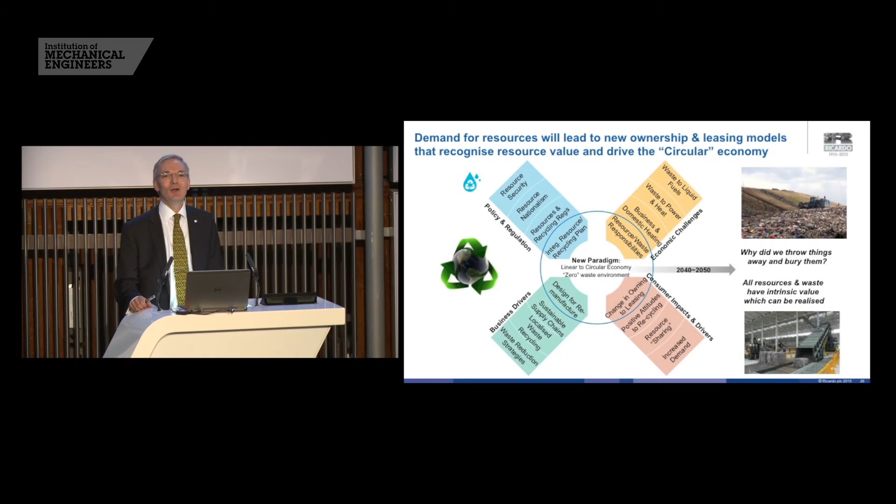Next thing, 2040 to 2050, we'll ask the question, why did we throw things away and bury them? We're getting to the stage where in an average waste landfill, there's probably more value in the materials in that waste fill than in many, many conventional mines for rare materials. And we'll end up going and remining those waste dumps, try and get some of those materials back. We'll live with a situation where all resources and waste have intrinsic value which can be realised. So we never throw anything away.

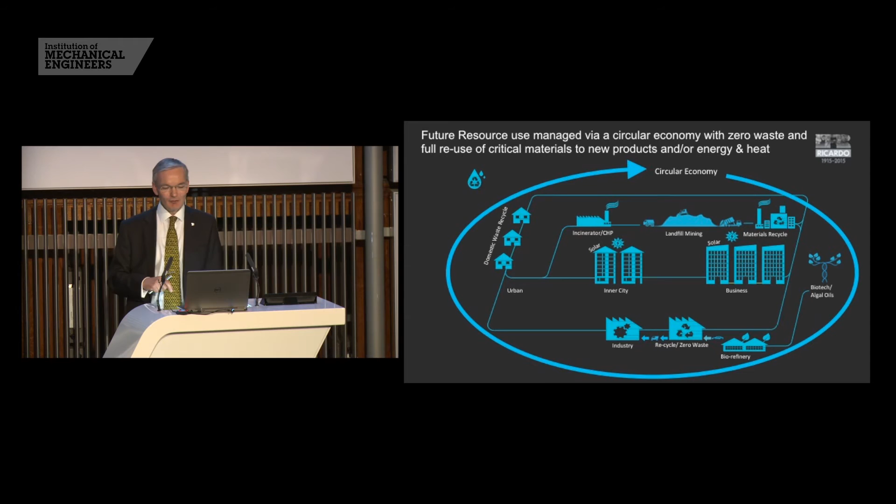Again, a cartoon here to show how all this works, from domestic waste recycled through to materials, doing our landfill mining to recover the scarce resources that were previously thrown away, either recycling those materials or burning them, using them as energy or turning them into liquid fuels, supplying domestic, inner city and business environment, using biotech, algal oils and some other renewable energies for biorefineries, again for recycling into zero waste or use in industry. And all of this leads to what we call the circular economy, just completely reusing the materials we've got.

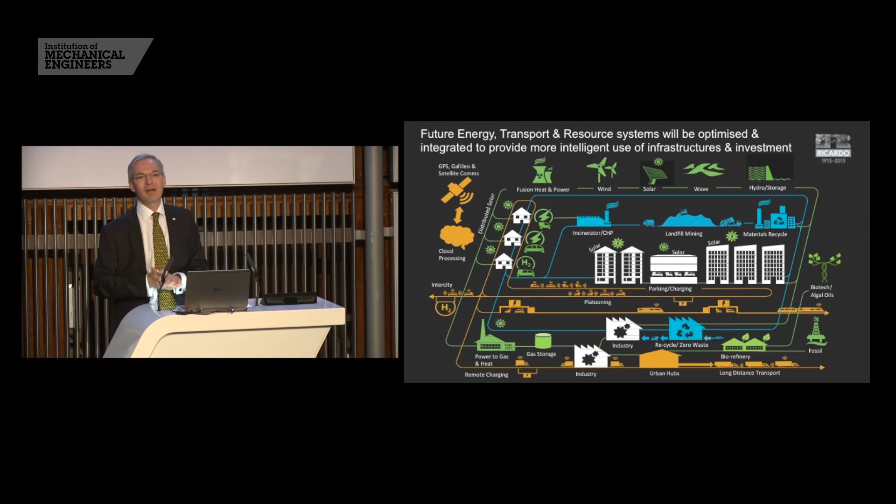And increasingly, as we move forward, many of these issues are totally interconnected, whether it's mobility, energy or resources, all of them joined together. And you can show this with the last 3 slides, all put together. This is the connected system. This is the future where we're going to live. With all the different connections and complexities, understanding how to optimize the system is way beyond what we as humans can do. We'll need this level of artificial intelligence and optimization to actually work out what's the best way to connect the system and make it work as efficiently as possible.

What I want to move on to now, getting towards the end of the lecture, is really about future engineering and our responsibilities. I've put 3 pictures up here. Hopefully some of you will recognise who these people are. This one, well known to us, Brunel, originally trained as a civil engineer. That was the key thing to be in the 19th century. This one is Henry Ford, mechanical engineer, the father of the motor car and future mobility, major entrepreneur. This one, Steve Jobs, again known as the latest generation of entrepreneurs, largely in the information and communication technologies field. Things are generally changing in that direction. So

engineering was celebrated in the 1900s, but today our conventional view of civil and mechanical engineering has probably moved on. We always ask this question, what is an engineer? Is it a mechanic? Is it a technician? It's one of the challenges we have with the future generation, is they think of an engineer as the guy who comes and fixes the washing machine, or helps mend some mechanical device, or mends the car when it breaks. We've increasingly got to show that future engineers are about very sophisticated technology, including all those communication technologies and sophisticated software that we talk about.

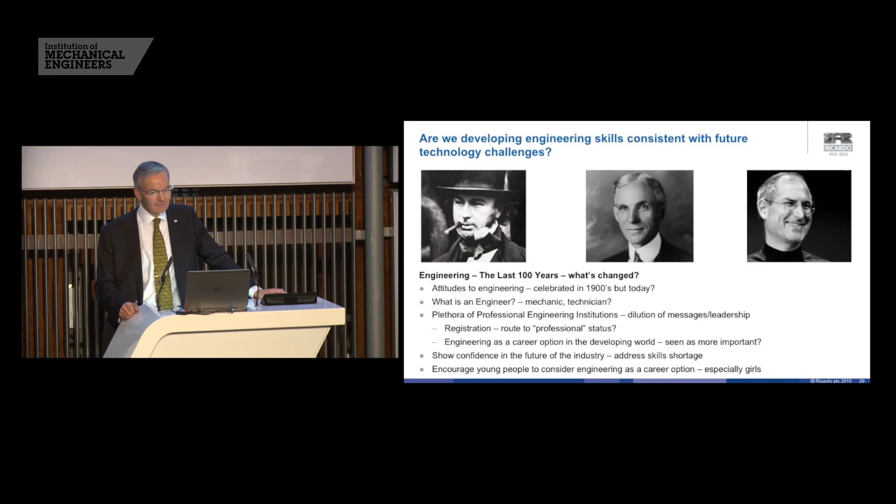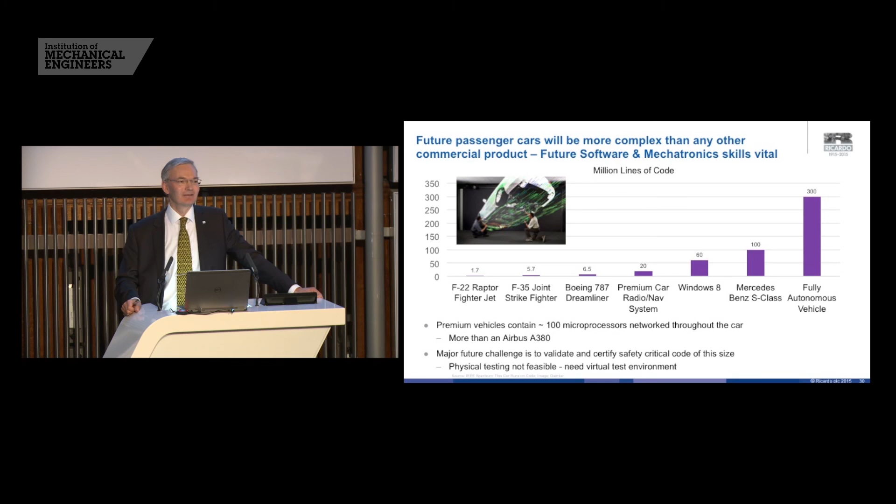The major future challenge we have is how we validate and certify a lot of the safety critical code in those products. How do we do it? Increasingly, we're unable to do the kind of physical testing that we used to do. I was talking to a chap from Bosch a couple of weeks ago. He said for them to certify and validate their next generation of driver assistance systems on the road takes 1 million kilometres of driving. That's simply not sustainable. What we'll need to do is develop the virtual world where this testing is done in a virtual environment. And that's a key requirement for the future generation of engineers, to move from their connected world and expand that into a virtual world that delivers us the future products that we need.

So to finish up with some final conclusions here, we've shown a lot about innovation, but true innovation is born out of the need to meet enduring drivers, and those enduring drivers are almost certainly the drive towards sustainability and zero environmental impact. And whilst legislation can initiate change, sustainable innovation always meets commercial requirements. Key statement here, in the real world, economics rules. If you can do it cheaper, you generally will. And we need to bear that in mind. Subsidies do not work in the mass market or in the long term. How do we make these things happen?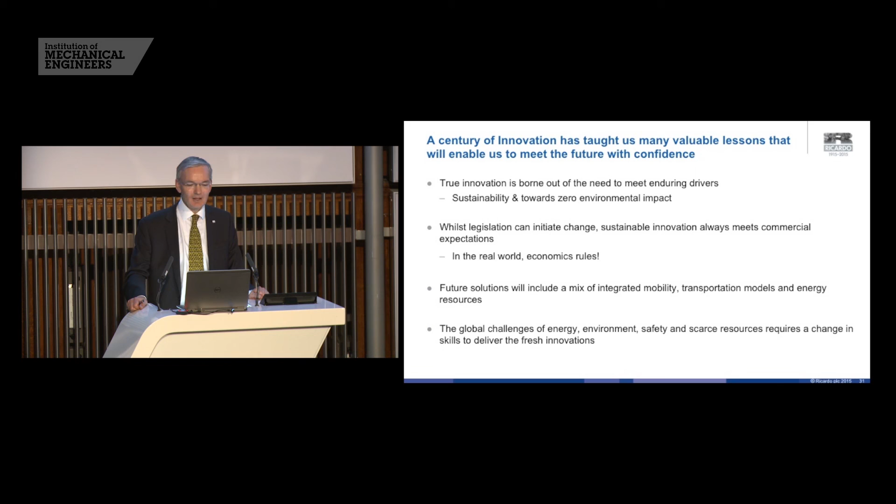Future solutions include a mix of integrated mobility, transport models, and energy resources. All of these things are entirely interconnected, and we'll need very sophisticated understanding and future systems to understand how to optimize those things. And we need a different attitude to the skills that we need for the future to meet these challenges, to meet these fresh innovations. Our future engineers need to adapt this massive increase in connectivity that they all understand to give us that future view of how we develop future products. So that concludes my lecture.